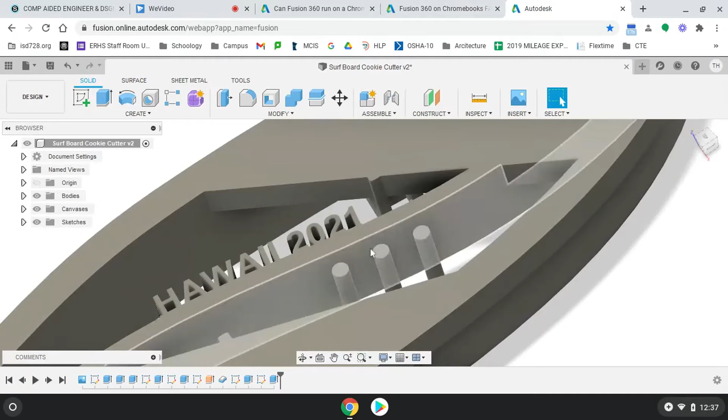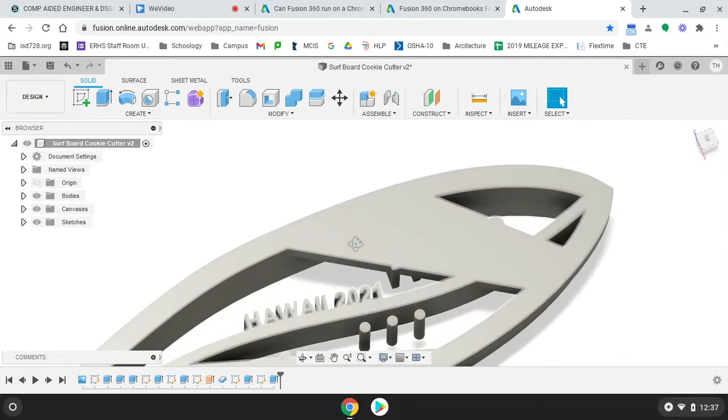Next piece is we got to connect some islands here. And what I'm talking about, I'm not talking about the Hawaiian Islands, but these three bubbles here that I'm pressing into that surfboard, just giving it a little design flair. With those three bubbles, if I just print this with a 3D printer, those are going to fall out. So what I need to do is connect those somehow.

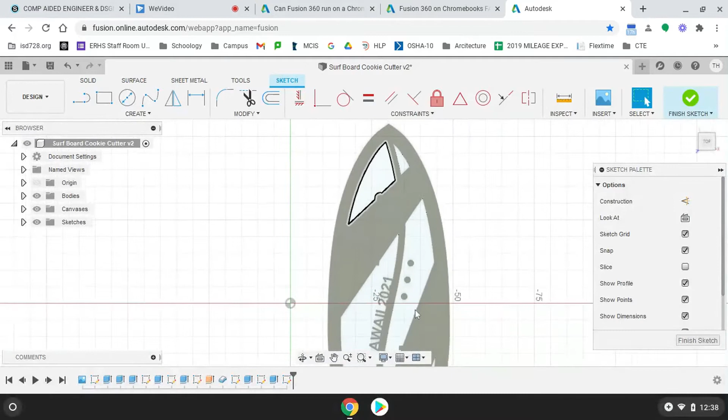So I'm going to make a new sketch on that top surface. And those three islands here, I'm going to connect, just like I connected some of that text. I'm just going to connect them from here across to here. So I'm going to draw a line across. I didn't want to draw that, sorry.

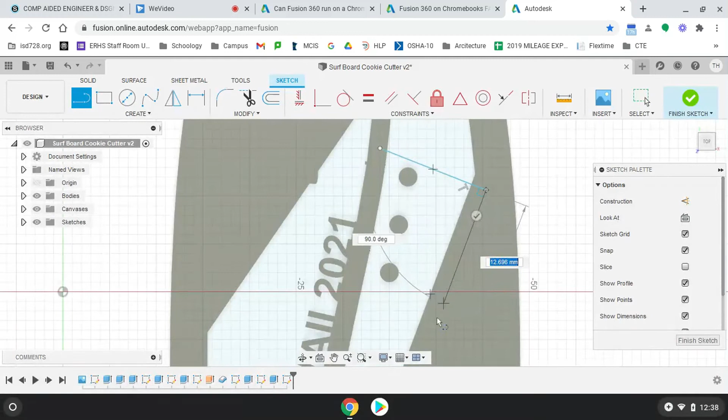Now you may be thinking, why don't you just fill this whole thing in? But what I found is it's good to have holes in here because it allows the cookie to release when it's actually coming out of the cookie cutter. Plus I can use a little stick and poke it out if I'm having problems.

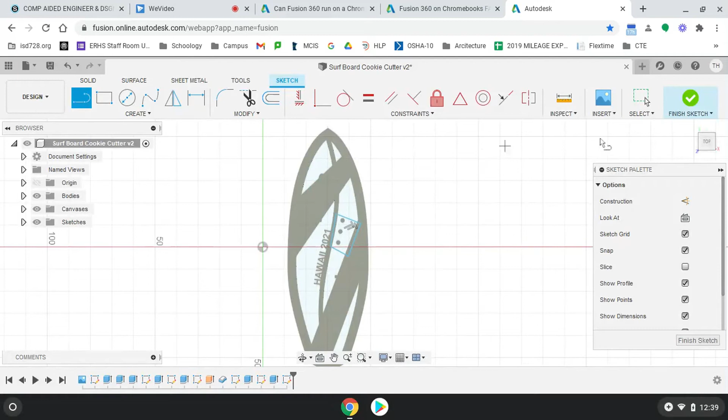So I finished the sketch and I hit extrude. Again, I go to home view to extrude so I can see what's going on here. And I'm going to pick that piece, plus this piece, plus this piece.

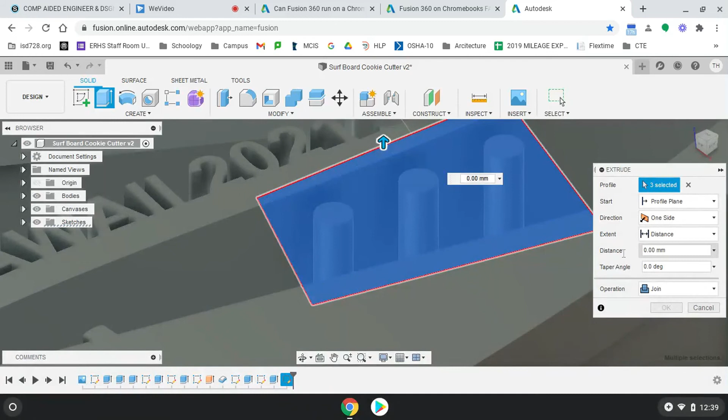It's a new body. I want to go to join. Always want to do a join. Distance -4 millimeters, just like we've been making all of our distances -4 for all of our thickness here. Hit OK, and that's how you close up an island.

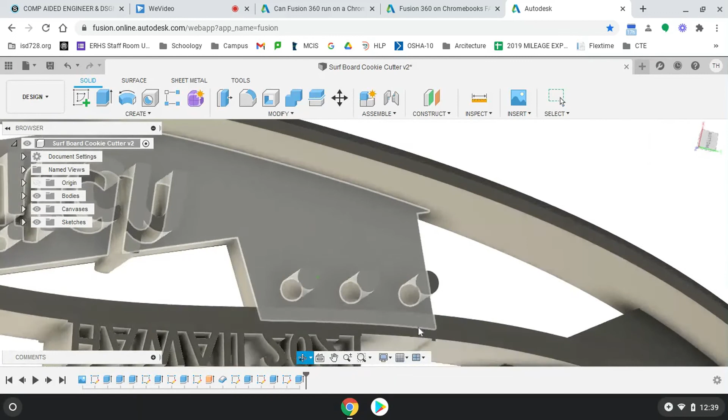So if I flip this to the bottom, I can see those dots are hanging in there, but they're actually connected to something. So that's closing up the island.